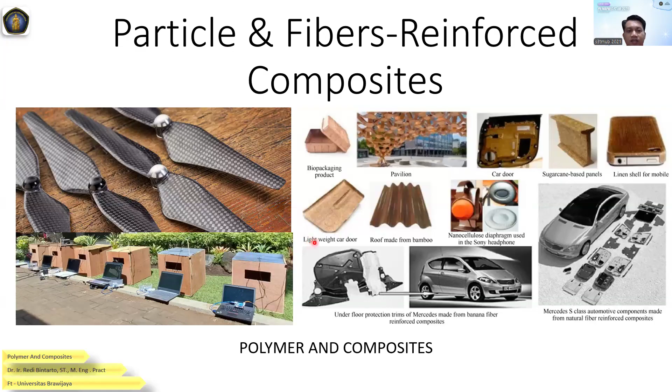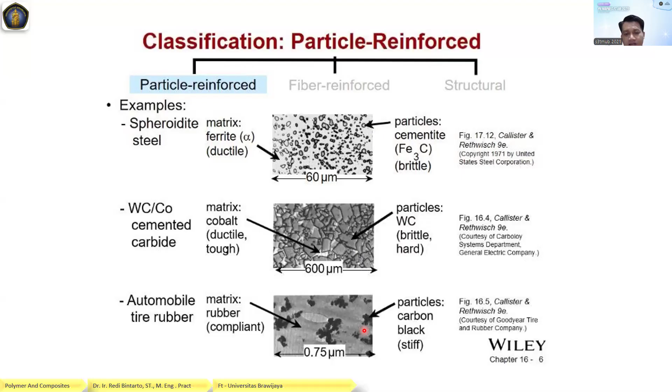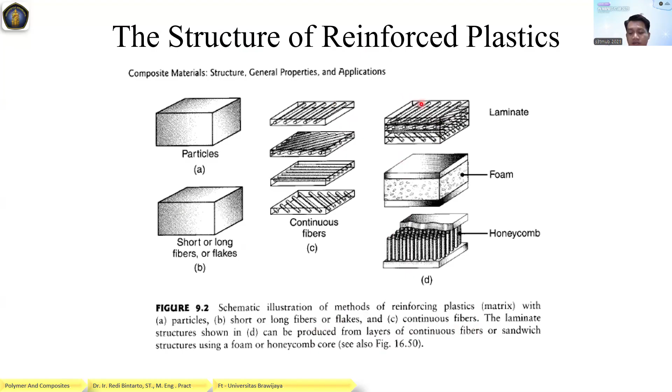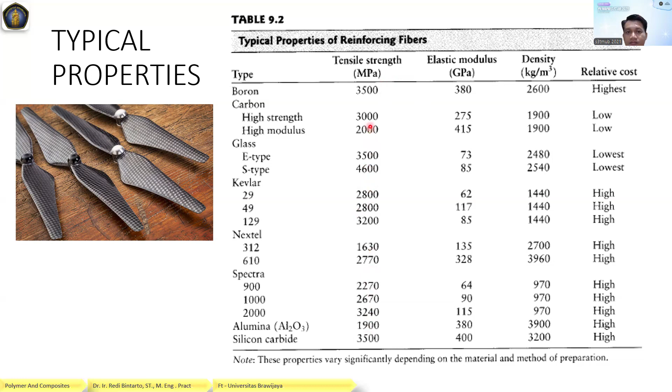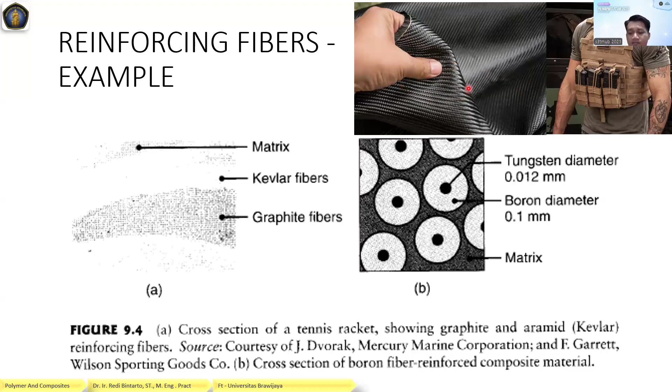So with differences of the fiber, we can see some parts, like this is a ransel, a backpack for the army, and maybe a car's body or something. Fiber is very strong and stiff in tension.

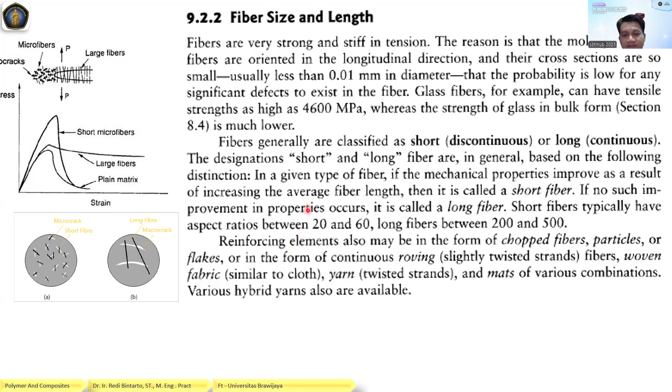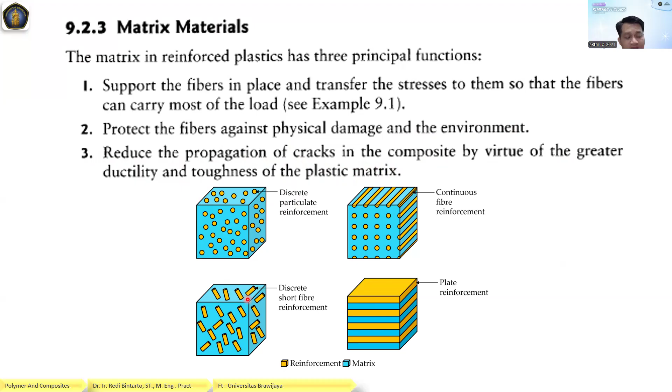The three principal functions: the first, they support the fibers in place and transfer the stress to them so that the fiber can carry most of the load. The second is protect the fiber against physical damage and the environment. And the third is reduce the propagation of cracks in the composite by virtue of the greater ductility and toughness of the plastic matrix. So all kinds of fiber reinforcement, particulate reinforcement, have a special function for the composite.

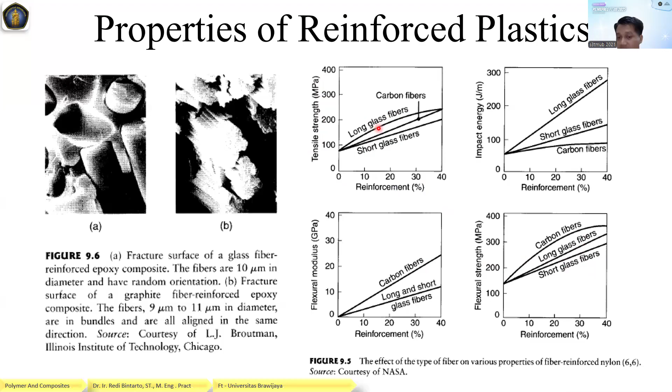How about the other fibers? It will be different because they have different tensile strength and flexural strength. Strength and elastic modulus of reinforced plastic. This is the fiber reinforced plastic, and the example, a pipe and some, I mean, what is it like? Carbon fiber.

When we compare the reinforcement, about the direction of the fiber when we produce the composite, we can see this graphic. This is glass reinforced polyester.

When we use random, the tensile strength could be lowest here, but when we add some fiber in the matrix orthogonally, there is slightly higher tensile strength, and the highest is unidirectional, just one direction, like this.

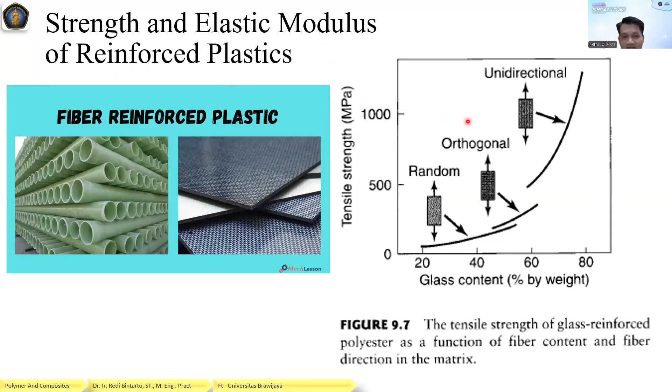We can calculate the stiffness of composite and load supported by fibers. This is the example. Assume that a graphite epoxy reinforced plastic with longitudinal fibers contains 20% graphite fibers. The elastic modulus of the fiber is 300 GPa, and that of the epoxy matrix is 100 GPa. So they have different elastic modulus. Calculate the elastic modulus of the composite and the fraction of the load supported by the fibers.

So we have the data, and the X in the presentation is 20%, 0.2. Elastic modulus of fiber 300 GPa, and elastic modulus for the matrix is 100 GPa. So we can calculate by equation E composite, I mean elastic modulus, 0.2 times 300 for fiber, plus 1 minus 0.2, because this is 20% and the whole material is 100%. So 1 minus 0.2, 80%, times 100, because the elastic modulus is 100. And then 60 plus 80, 140 GPa.

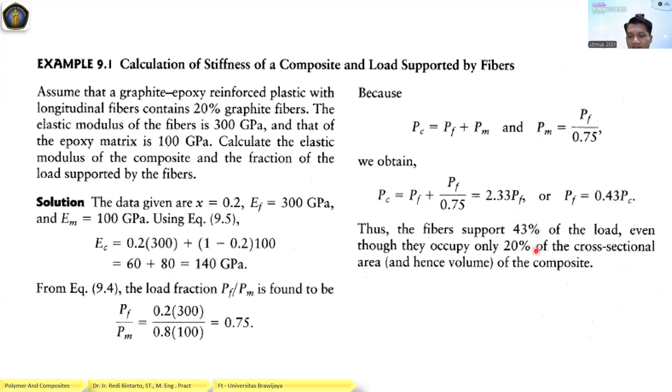Some applications of reinforced plastic. This is a sailboard. Usually people use it on the weekend at the beach. What kind of material is in the sailboard? There is a glass fiber reinforcement, laminate composite, ultralight expanded polystyrene foam core with honeycomb. These are compound layers, glass reinforcement, extra tough three-layer multi-axial glass with double coating polyurethane lacquer with non-skid finish. This is the body. Impact resistant printed polycarbonate skin, embedded honeycomb sheet paper, carbon or Kevlar fiber strips. One sailboard contains many kinds of composite.

And this is a body armor, showing the layers and woven fibers. So when they got shot by someone, the body armor can protect the people.

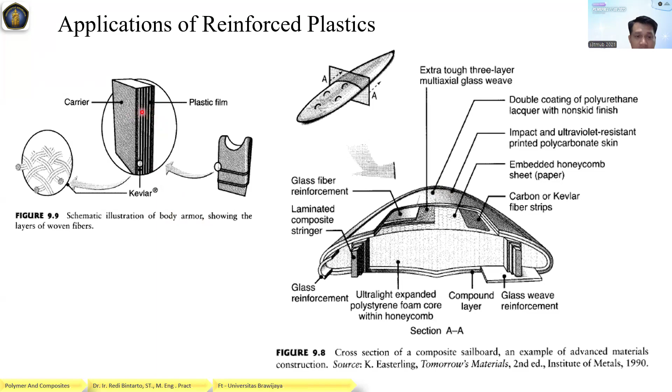So next is some types of matrix composite, polymer matrix composite. This is on the polymer. We can use thermoset, thermoplastic; thermoset like epoxy, thermoplastic like PEEK, PEK, PBI, PPO, PE, PP, nylon. This is the type of the thermoplastic. The filler, the fiber: glass, carbon, boron fiber, polyethylene, aramid fiber, carbon black, silica, talc, nanofiller. And divided by fiber reinforced composite, continuous, discontinuous, long and short, aligned, randomly oriented. This is the orientation of the fiber itself, because it can affect the stiffness.

Particle, large particle, dispersion strengthened. I mean, the dimension of the particle could be different. There's large and small particles. And structural composite depends on how we use it layer by layer, laminate and sandwich.

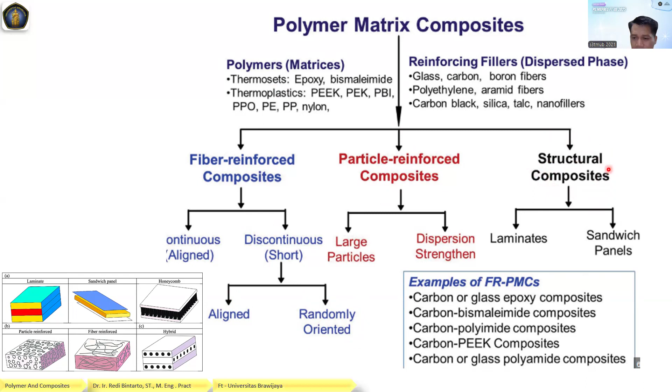And there are so many plant fibers, according to the origin. Origin: mineral, animal, and cellulose. For example asbestos, mineral, animal hair, silk and wool of the animal. And then cellulose is from the plantation, we can find bast, grass, leaves, seeds, stalk, wood, and many kinds of fiber from the plantation, bamboo, sisal, corn, oil palm, and so on. In the research area, we can use any kind of this fiber.

We can add the composite in every material. For example, rooftop, roof of the house, or car body and so on. Because composites have many kinds of ability. They can decrease the temperature inside the cars or house. They can decrease the acoustic or something.

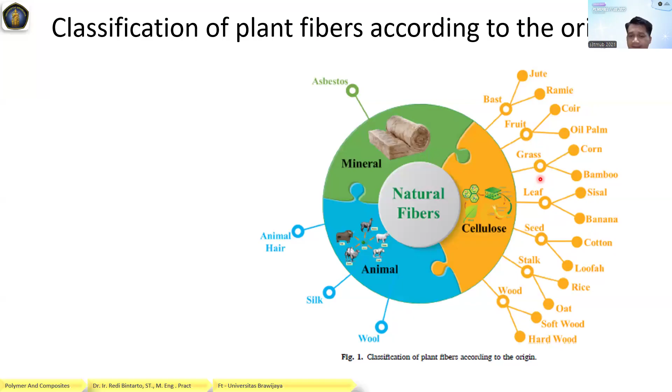Some natural fiber we can see from bamboo, alfa, corn, abaca, sisal, and so on. All this material, we can try to applicate to any kind of research we want to do with it.

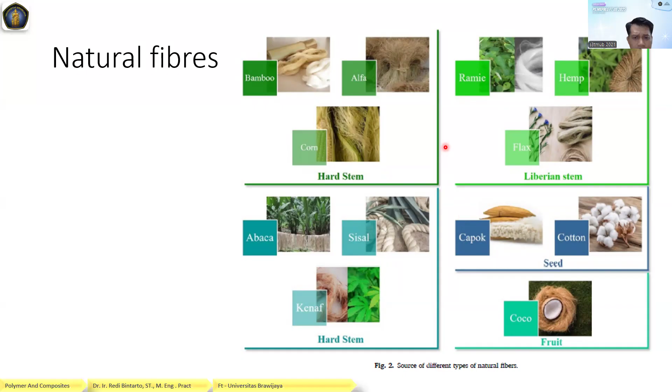So when we want to add another matrix, we have to decrease the lignin inside the plant fiber, by some kind of process.

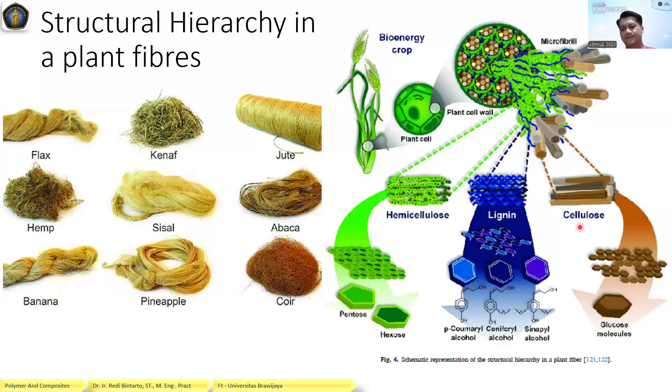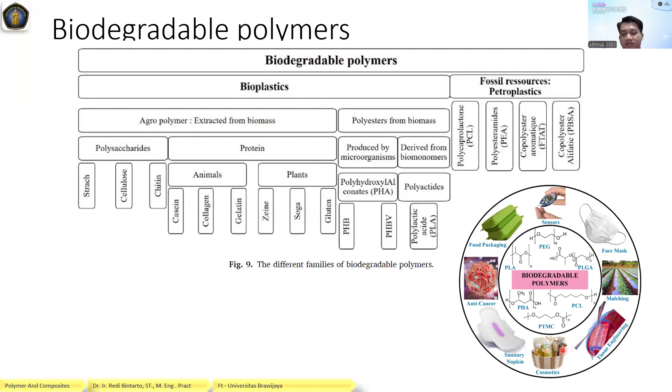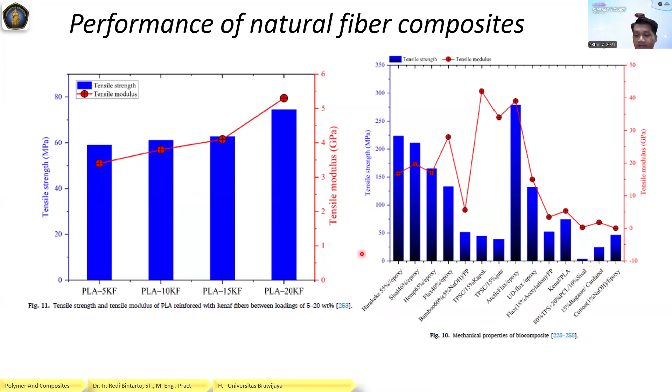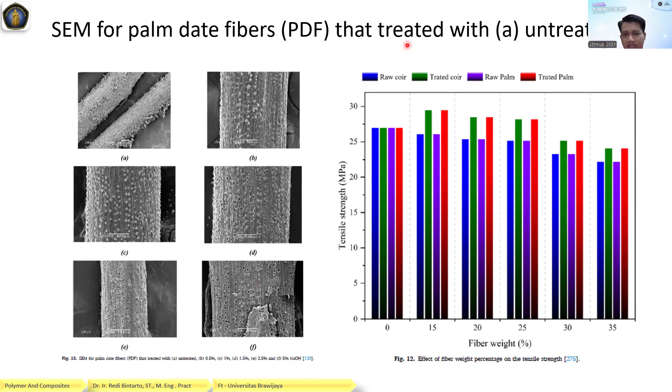So this is different between raw and treated. When they add NaOH, they can increase the bonding between the fiber and the matrix, and increase the tensile strength. That's the point - which is best between treated and untreated.

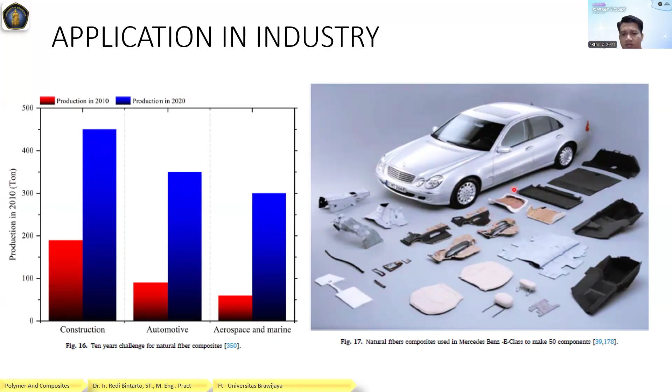Many applications in industry - aerospace, automotive, construction. We can see in the new era they have the highest use of composite, more than 50%, and almost 50% of the parts of the automobile are made by composite.

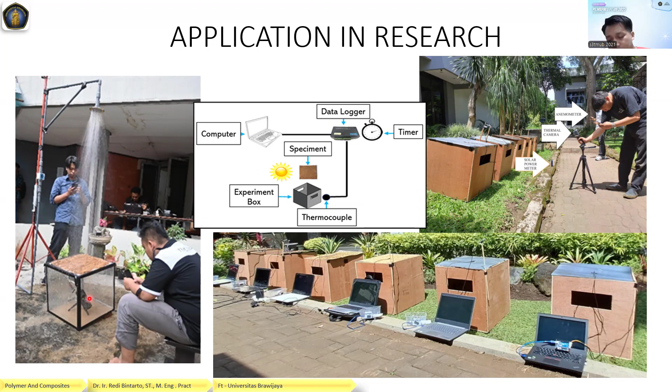We try to show you how composite is applied to the research.